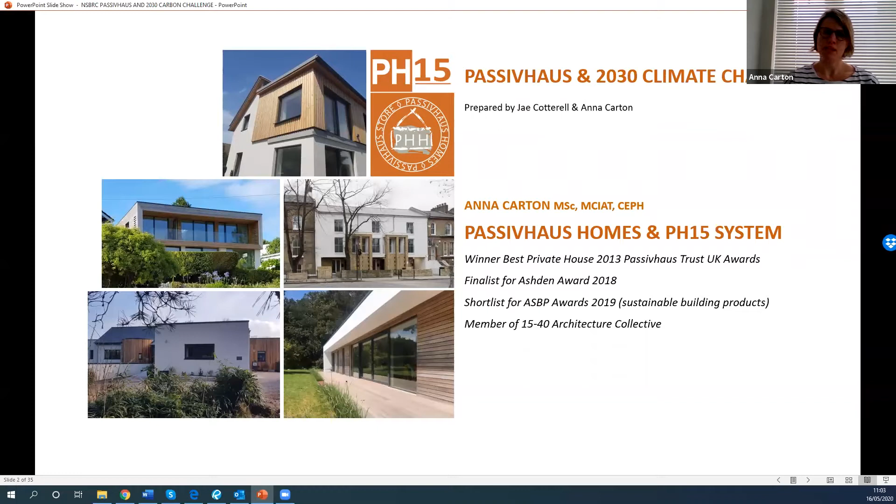But more recently looking at the embodied carbon side of it. So I'm going to start my presentation today by asking you all to ask a question of yourselves, really, which is: what's important, or what makes up a sustainable building, in light of the climate emergency and also the targets for 2030 and 2050?

The wheel on the screen is actually one that came about through a discussion with a number of other sustainable building designers and architects who have all worked in this field for over a decade, some people over 25 years.

All of us Passivhaus designers were in agreement that we should be focusing our energies on targeting operational energy, which is obviously the Passivhaus element, but Passivhaus also spills into what you choose to build with, and now with Passivhaus Plus and Passivhaus Premium, the renewable fuel sources you choose to run that building.

In our wheel, we've also got other things you might think are outside of sustainability. You might think design is outside sustainability, but obviously we're going to look after the buildings we appreciate aesthetically, so things like this are also important and might be in your wheel. Other things might be biodiversity, community, economics, etc. So I wanted to invite everybody to think about what would go into their wheel.

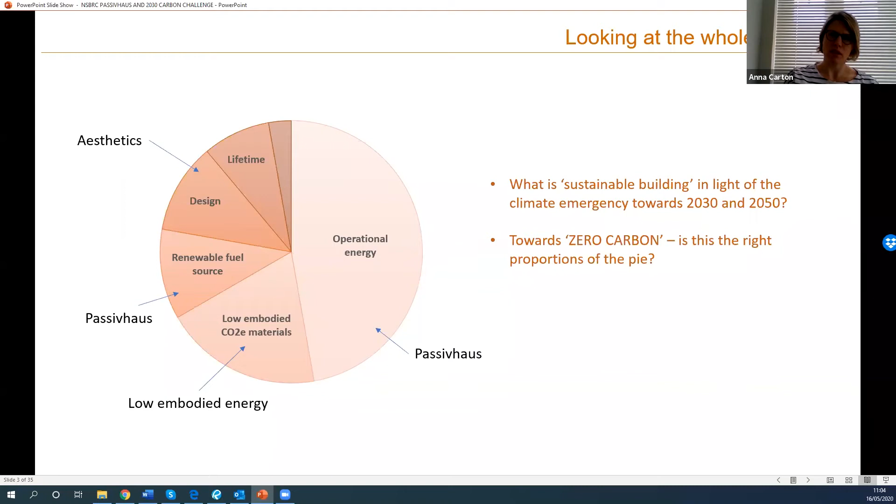The other thing I wanted to raise at the start of this presentation is this bar chart by Greenlite Energy Assessors, and this highlights three things really. The first thing is...

...that buildings are perhaps the longest lasting physical things that humans create. So the impact of your decisions as a building specifier or building designer will echo long into the future, and the impacts are far-reaching.

The second thing is that it's not just what you make the building of, but also what you put in the building—the components that will need periodically replacing. How many times they'll need to be replaced over the lifetime of the building is something to think about as well.

And the third thing this lifespan of things shows quite well, I think, is that 2030 is really not a long time away at all, and certainly not a long time in the context of building cycles—how long it takes to go from finding your site to finding a designer to actually building a project.

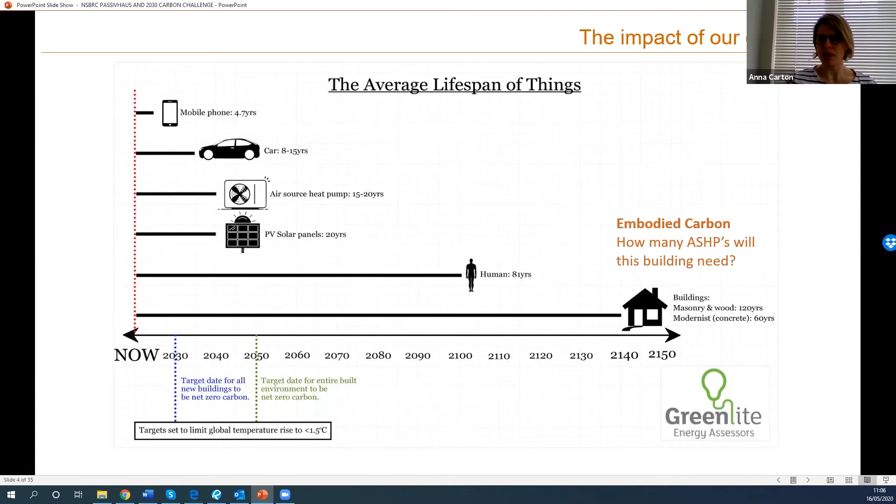It's a very, very short period of time. So you really need to know where we are and where we need to get to net zero carbon in just 9.5 years. So the RIBA published their climate challenge document towards the end of last year, I think it was in November.

They very helpfully provided a series of target metrics for domestic and commercial buildings, but I'm just talking about domestic buildings here. That covers three things: operational energy, embodied carbon, and also water use. I'm not going to talk about water use, just operational energy and embodied carbon.

If we look at the operational energy number, it's suggesting 0 to 35 kilowatt hours per metre squared per annum by 2030. You all know from Chris's talk that the space heat demand in a passive house should be 15 kilowatt hours per metre squared per annum or less. The Committee on Climate Change have suggested we need 15 to 20 by 2025 - in just 4.5 years - they are suggesting we move to the Passive House standard, or buildings that follow its principles, to get the space heat demand as low as possible.

So we think on operational energy, Passive House is sort of in the zone of where the RIBA are telling us we should be, where the Committee on Climate Change are telling us we should be. This is also in line with what the Green Construction Board is saying, what the Green Building Council is saying, what RICS, the Royal Institute of Chartered Surveyors, and CIBSE, the Chartered Institution of Building Services Engineers, are saying. So the designers' industry are certainly in agreement that we need to get operational energy down below 35 kilowatts.

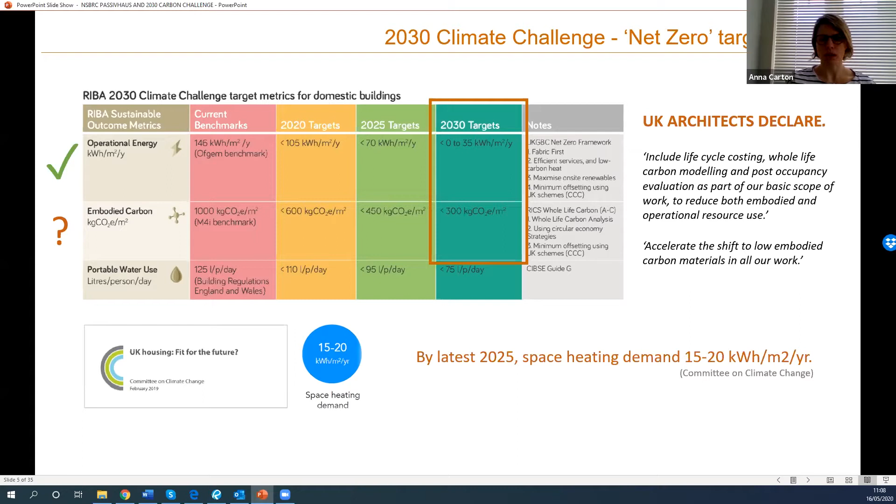In terms of embodied carbon, they've set a target of 300, and what I'm going to explore today is what that actually means. The reality is the sustainable building industry has probably been more focused on operational energy and less on embodied carbon until fairly recently. But now we're seeing much more focus on embodied carbon, and we're going to look at some examples in this presentation today.

So embodied carbon is measured using this British standard. If you look up an environmental product declaration certificate for some of your building products - some might not have them, but more and more companies are doing this and should be doing this - you should find they report embodied carbon values for each stage of the product: extraction of raw materials, transport to the manufacturing plant, manufacturing to site, construction, building use, maintenance, repair, replacement, refurbishment, and finally end of life - when you take the building apart, or whether it becomes recommissioned, reused, or the materials are disposed of.

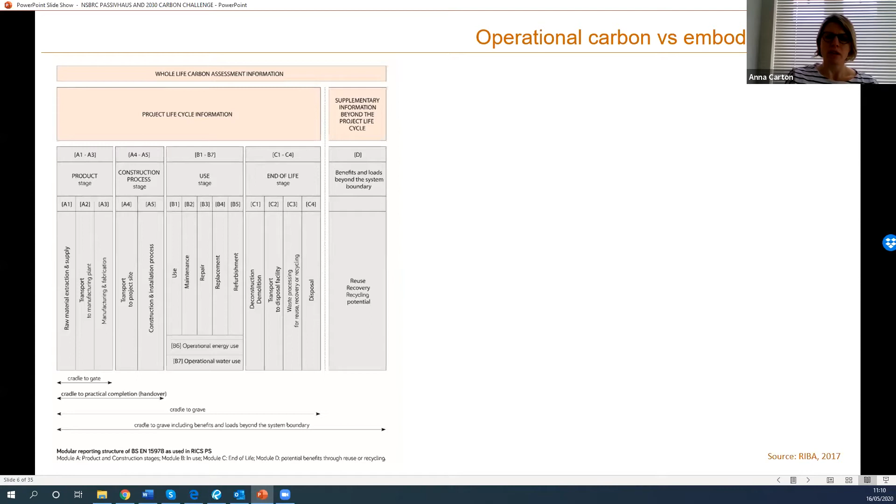So stage C perhaps requires a little bit of a crystal ball, particularly for a new building, trying to predict what might happen to it over 100 years - it requires many assumptions, but they can apply some figures based on today's values. So the RIBA Climate Challenge wants us to get to 300 kilograms of CO2 per metre squared across A1 to C4 - that's from taking materials out of the ground to disposing of the building at the end of its life.

Some materials have carbon sequestration potential - or carbon storage potential, I should say - materials like timber. But you can only count those right at the end of its life. So if you have a study that looks just at A1 to A5, you cannot count the carbon storage of those materials; you can only count them at the end, for obvious reasons.

Passivhaus, the Passivhaus standard, is directly only really interested in B6, which is operational energy use. But indirectly, because of the decisions you make to get there - looking quite closely at the building fabric - it obviously then covers all the other things indirectly.

So you might look at the table on the left and think B6 is just one stage of many - it looks relatively insignificant. But as the wheel on the right, which is a Simon Sturgis study, shows, it can make up a significant chunk of the whole life carbon emissions of a building. In this case, it's about a third.

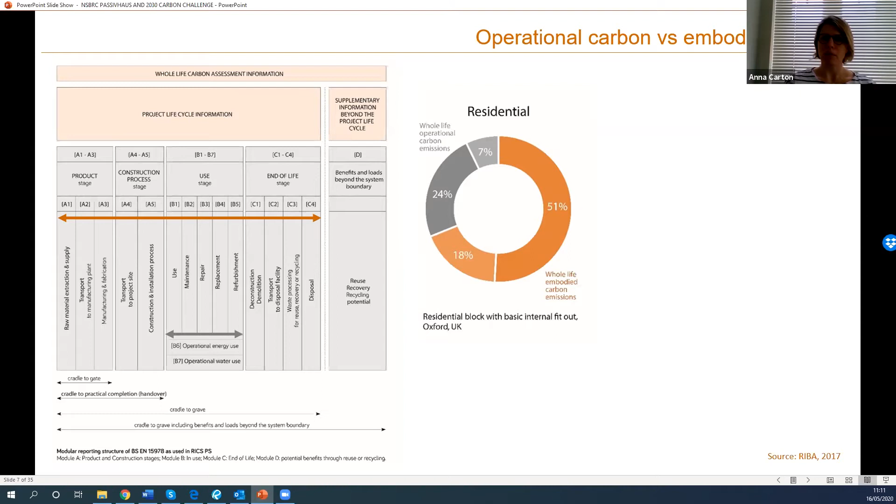In a particularly poor performing building, it might be more than that. In a better performing building, it would obviously be smaller.

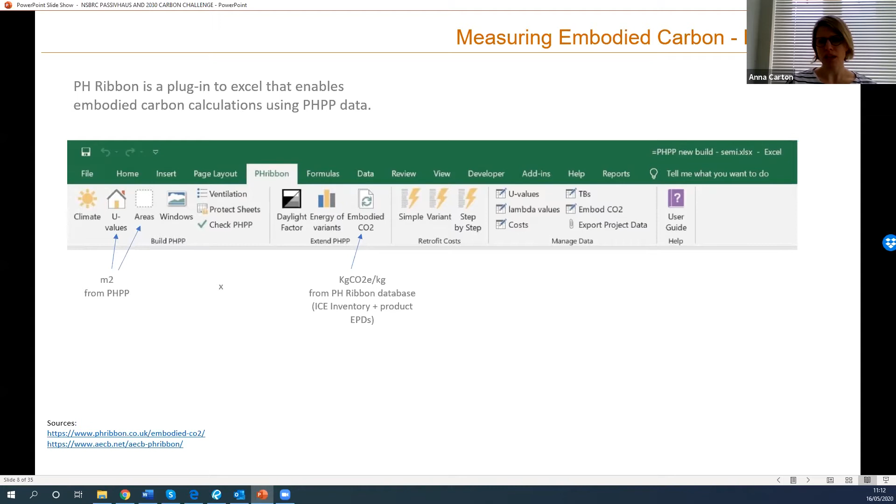A way of measuring embodied carbon for Passivhaus buildings is now available, called the PH Ribbon, which is very easy to use. It basically takes the information you've already put into your PHPP: you've already got the U value on the U value sheet, you've already specified all the materials making up the fabric of the building, and in the areas tab you've already assigned square meterage to those materials. Then it simply applies an embodied carbon value, or you apply one, to those materials, and it will do a calculation for you. We'll look at some examples in a minute.

So we know we've got to get from 1,000, which is the benchmark or target for today, 2020, down to 600, and eventually to 300. Now I'm just going to look at a few examples of what sort of numbers some typical domestic constructions are reaching.

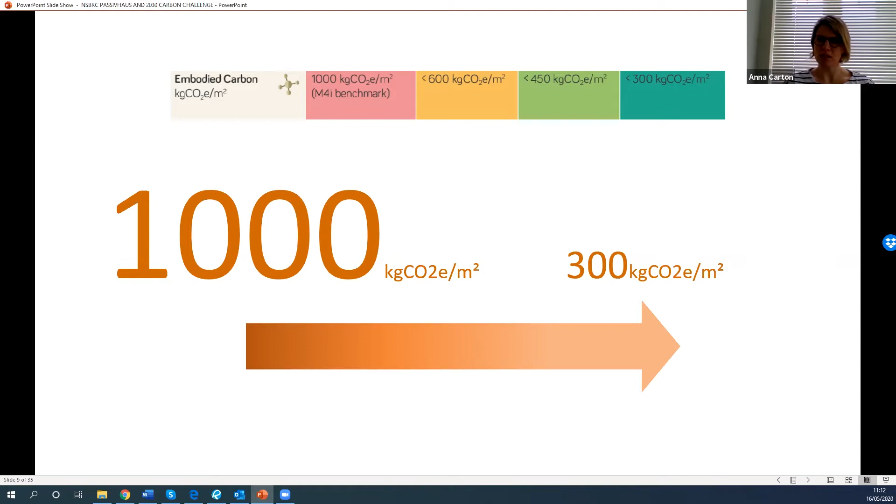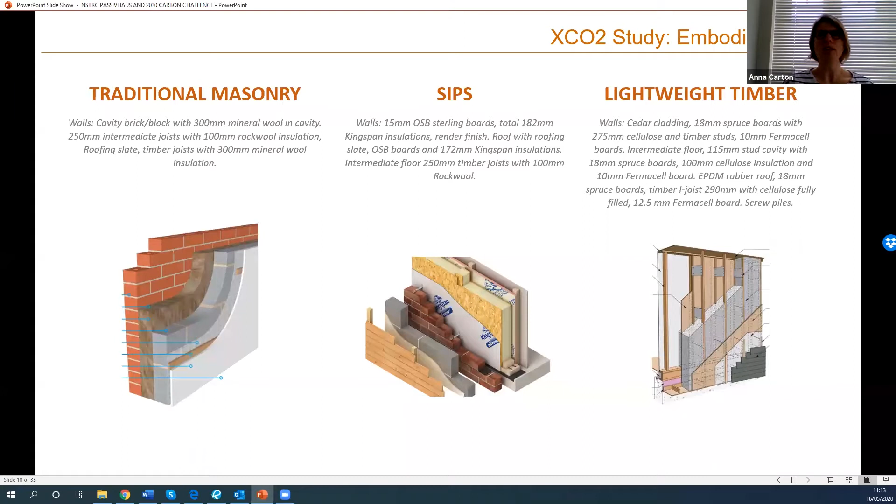If we look at traditional construction, this study, which is an XCO2 study, looked at traditional masonry, SIPs, and lightweight timber. But it only looked at cradle to gate, so that's A1 to A3, since the study is a few years old. So the figures we're about to see are only part of the picture.

Traditional masonry is coming out at 348, SIPs at 308, and lightweight timber, which we actually adjusted slightly to make all three options have a concrete slab and footings, is 231. So already we can see there may be a problem with the traditional masonry and SIPs options, because we seem to be failing and we haven't even got to site yet. Lightweight timber is coming in under the 2030 carbon challenge target, but again we're not even at site yet. So this 300 target is starting to look relatively challenging.

If you take the slab out, which is a significant portion of the embodied carbon, and you look at the building just above ground, you can start to see the real significant difference between the three construction options. There's a fourfold difference between the lightweight timber option and the traditional masonry option, and that's simply because masonry is heavyweight and also high embodied carbon. There's no carbon storage in these calculations because it's only A1 to A3.

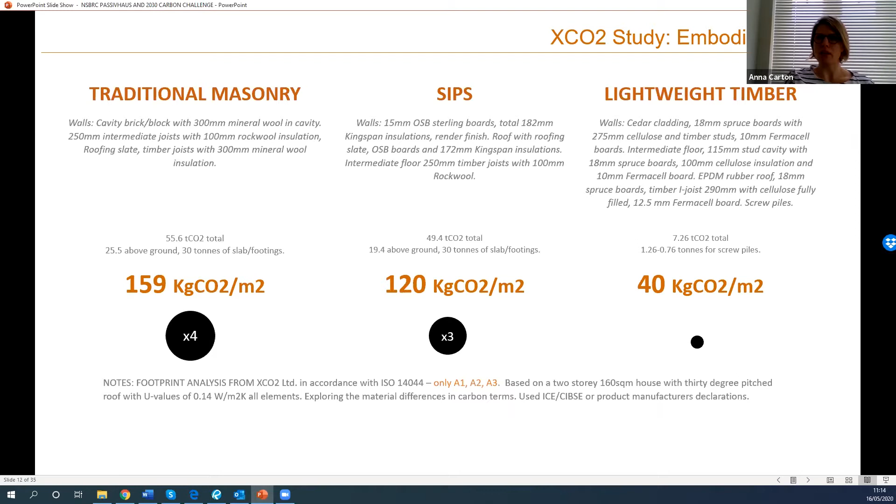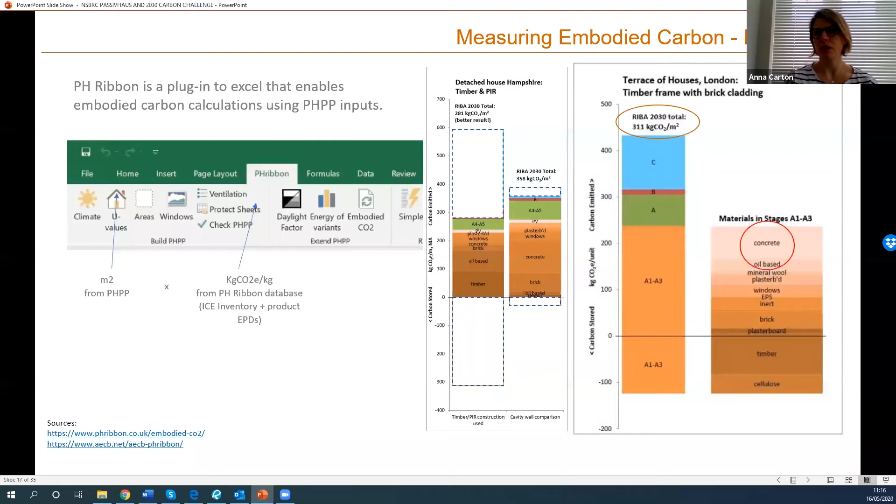Here is another example, also done by Tim Martin, looking at a timber frame terrace house with brick cladding. This obviously has the advantage of only having an exterior envelope on two faces. In this example we're not quite getting to the 300 — we're at 311. Again, the highest contributing materials are concrete and brick.

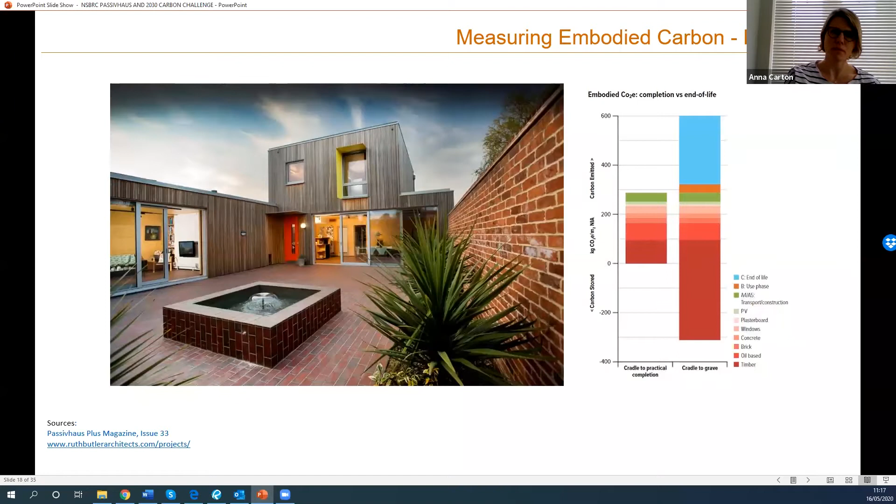So unsurprisingly perhaps, the Committee on Climate Change have identified that timber will be key to displacing high carbon materials such as cement and steel, and one of the most effective ways of using limited biomass resources to mitigate climate change. They want the UK to increase timber frame construction systems tenfold in order to triple the amount of carbon stored in UK homes.

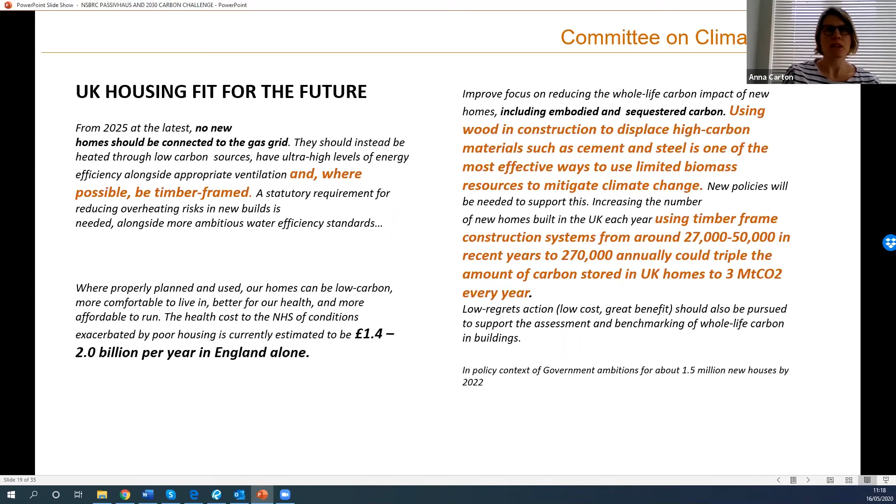Just before we go back to operational carbon, I want to summarise what we've just looked at: this target of 300 kilograms of CO2 looks quite challenging to achieve, and it looks particularly challenging or even unachievable with more typical ways of constructing in this country, which is cavity wall, heavyweight, lots of concrete, lots of massive masonry materials.

So if we go back to operational carbon, which I said is where we've sort of been focused as sustainable building designers and where we perhaps feel that we're doing better, we know that Passivhaus is 15 kilowatt hours of space heat demand, so we've got 20 left for all of our electrics, etc. So how are we doing?

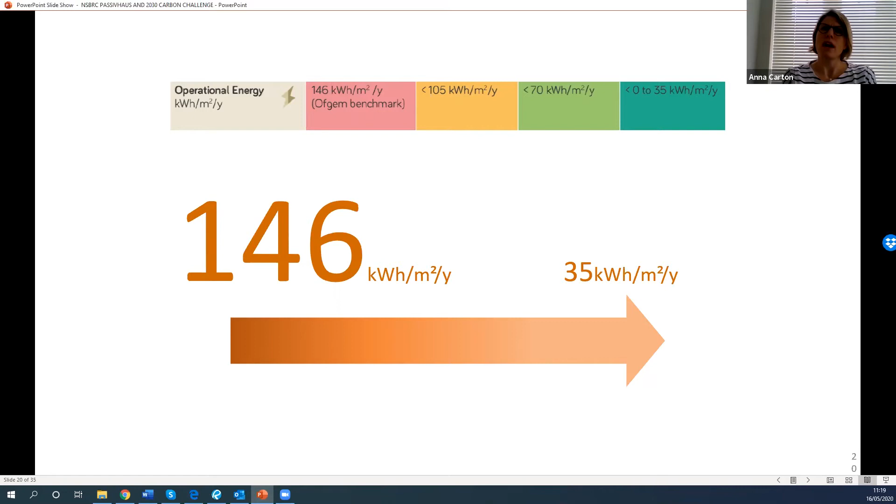Well, we looked at this number in the context of one of our projects. This is a PH15 project down near the New Forest. It's a detached house, quite a large detached house, 184 square meters of treated floor area. It's got a very low space heat demand - it did incredibly well on the air tightness, so it's a very low space heat demand.

It has a small PV array, and at the moment it has a gas boiler for heating and hot water. The client had wanted to go for an air source heat pump, but it was slightly out of their budget. So the idea is that they have a gas boiler for now, and then spend the next few years saving up for an air source heat pump and retrofit that in as soon as they're able.

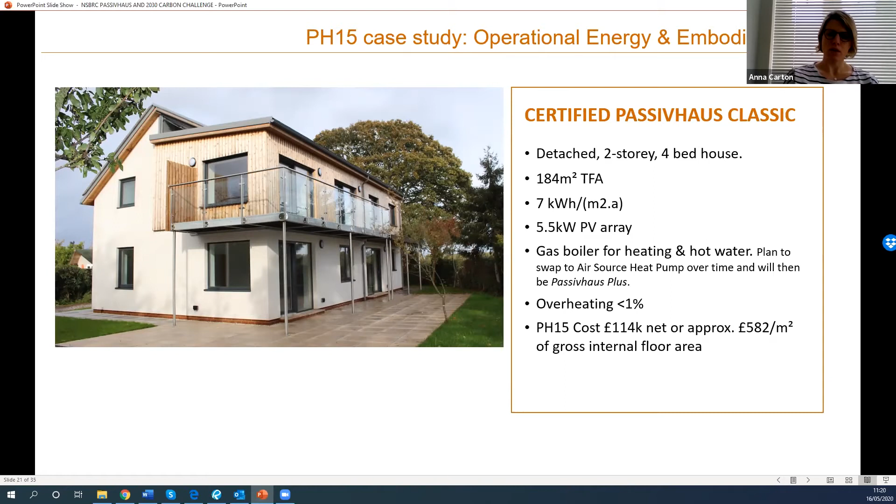So we looked at this house in terms of its current setup, which is basically a Passivhaus Classic - a gas boiler and a small PV array. A different option for Passivhaus Classic might be electric grid heating and hot water, and then what they want to move to, which is a Passivhaus Plus, air source heat pump, and the same PV array.

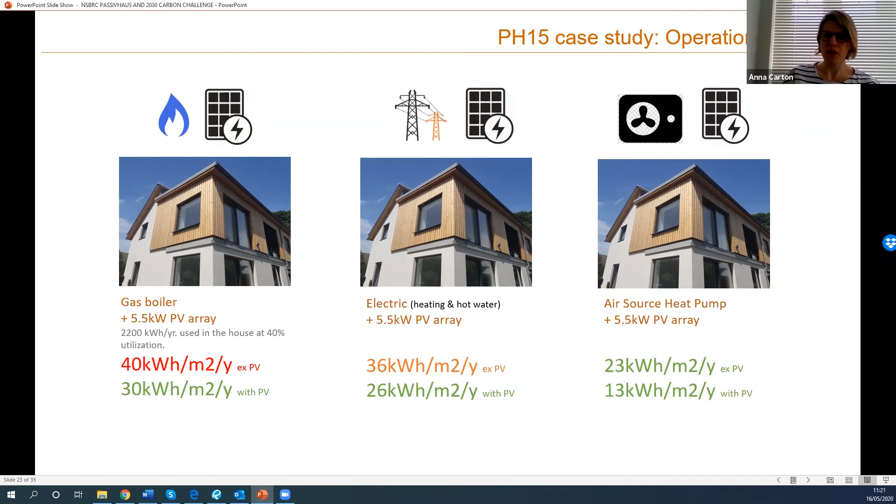The Passivhaus Classic options without the PV are not meeting the operational energy targets, the RIBA operational energy targets for the 2030 climate challenge. With the PV array they are, but by far the best performing, unsurprisingly, option is the air source heat pump, where you are obviously getting more - if you have a COP of 2, you're getting twice the amount of energy out that you put in.

If you convert - because obviously the operational energy is looking at kilowatt hours, the embodied energy is looking at kilograms of CO2 - so if we try and create some kind of comparison, we need to convert the operational energy into carbon. So if we apply a carbon intensity to these two forms of energy, gas and electricity, the difference becomes even starker.

So you apply that over a lifetime of 60 years, and you're looking at 65 tons of carbon over 60 years if you have a gas boiler, and just 12 if you have an air source heat pump. So that's an extra 53 tons of carbon over the 60-year lifetime.

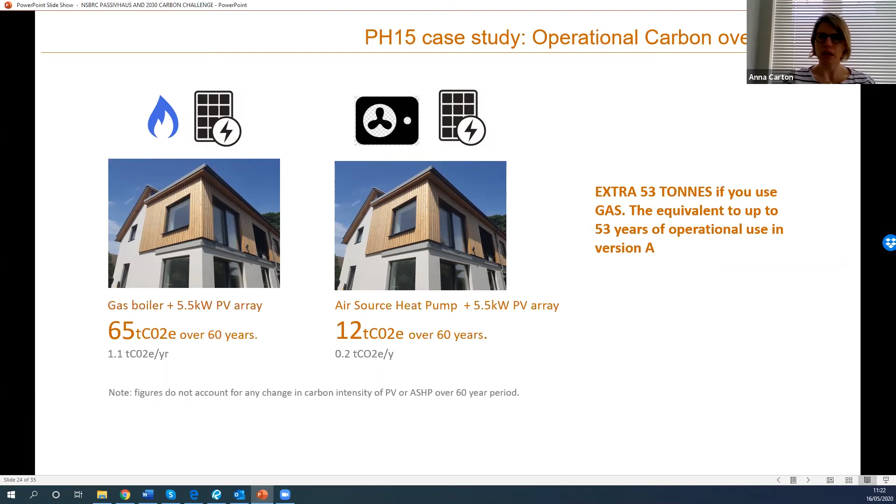And that's just the difference between going, if you choose a Passivhaus Classic building versus a Passivhaus Plus, and obviously if you use a Passivhaus Premium, then that's going to be better.

And the reason for that is that the carbon intensity of electricity has come down massively in the last 10 years. This graph is courtesy of Etude, and they told me that the drop is to do with the closing of a couple of coal-fired power plants. So if anyone was in any doubt of the impact of coal power plants, I think this graph highlights what a difference it can make if we move towards clean energy.

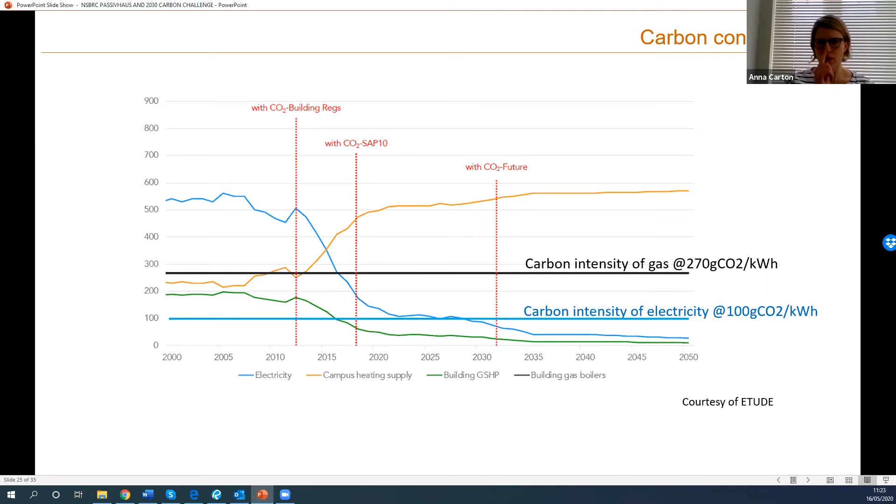There's obviously also been a drive towards much more wind-driven power in the UK, and eventually there will probably be more nuclear power coming in as well. So gas obviously is fixed - the carbon intensity of burning gas is fixed. So last year you might have read in the press lots of headlines like gas is dead and no more gas in new buildings. And this is the reason why electricity is the future for heating and hot water in domestic buildings.

So if we go back to the question of the wheel at the beginning and the balance of us looking at operational energy and embodied energy and where we should be putting our energies as designers - we apply the XCO2 figures to this PH15 house, which is of a similar size.

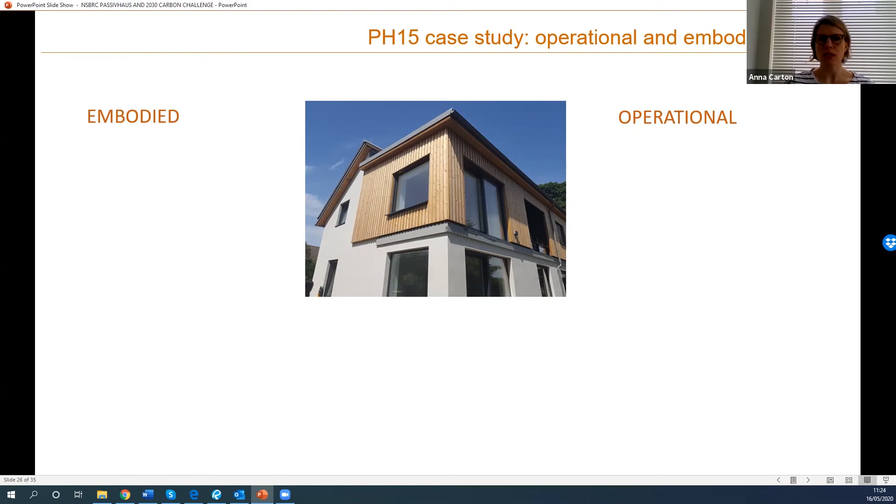The XCO2 study was a 160 square meter house. This one is 180, so we did a slight adjustment, and we got 37 tons of CO2. The masonry example in the XCO2 study was around 55 tons of CO2, so it's about 2/3 of a masonry building.

But bear in mind, this is only A1 to A3. What we're looking to do as a company is use PH Ribbon to do A to C studies on all of our buildings in the future.

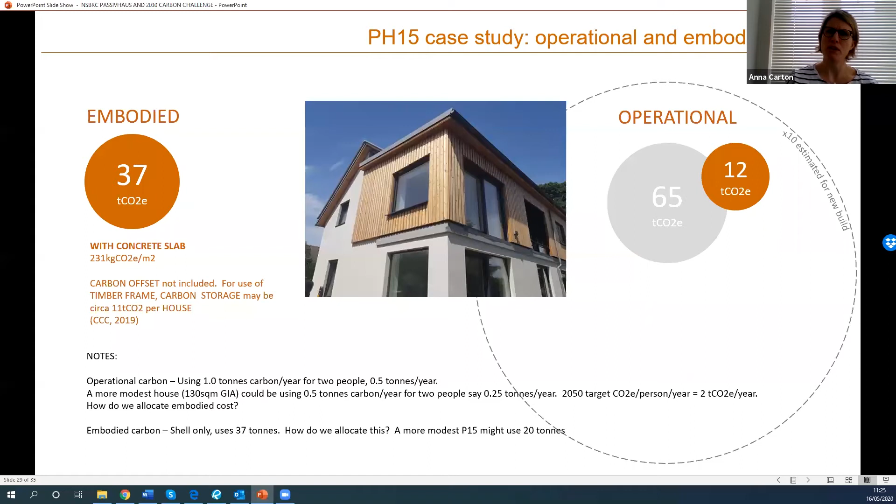If you went with a building reg standard building, that's probably about 10 times what this house was, perhaps even slightly more. So you can see that relative to the embodied carbon, if you're looking at 10 times the amount of operational carbon, suddenly that B6 in the life cycle assessment is looking relatively very important. I think that just highlights why we've been focused over the last 10 years on getting operational energy down.

To look at those results a slightly different way, this is an illustrative graph. It doesn't factor in fluctuations in the intensity of fuels. I've included one replacement of components, but the point is to illustrate that with the gas option and the air source heat pump, you can see them diverging across the first 15 years of that building. Then if the clients replace their gas boiler with an air source heat pump after 15 years, that gap will just be maintained - you'll never make back that carbon expenditure.

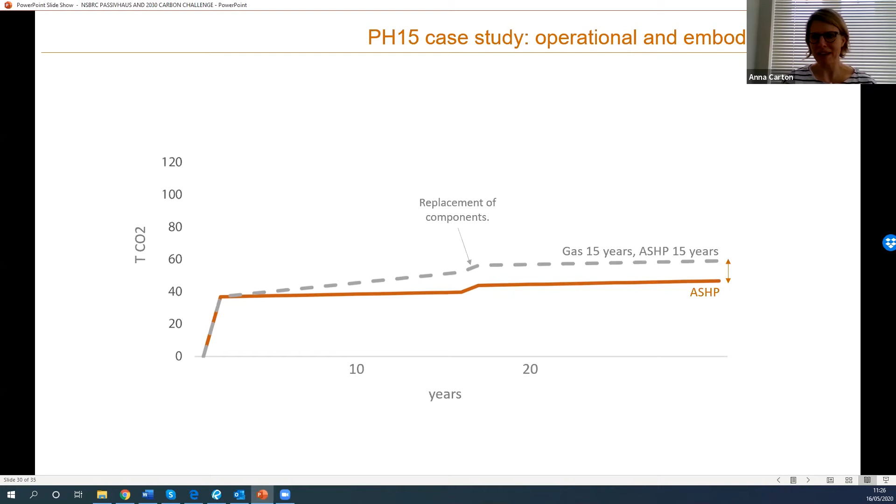The other thing I'm using this to illustrate is that if we have 10 years not just to get to the 2030 net zero target, but also address the climate emergency - if the next 10 years are critical - the decisions you make about the amount of carbon you're going to pump into the atmosphere as a result of the materials you specify start to look very significant.

The carbon over the next 30 years in this example, because it's a low energy building, is significantly smaller. But also, if the next 10 years are critical, and the consensus generally is that they are, we really should be focusing our minds on the materials we're specifying when commissioning or designing our buildings.

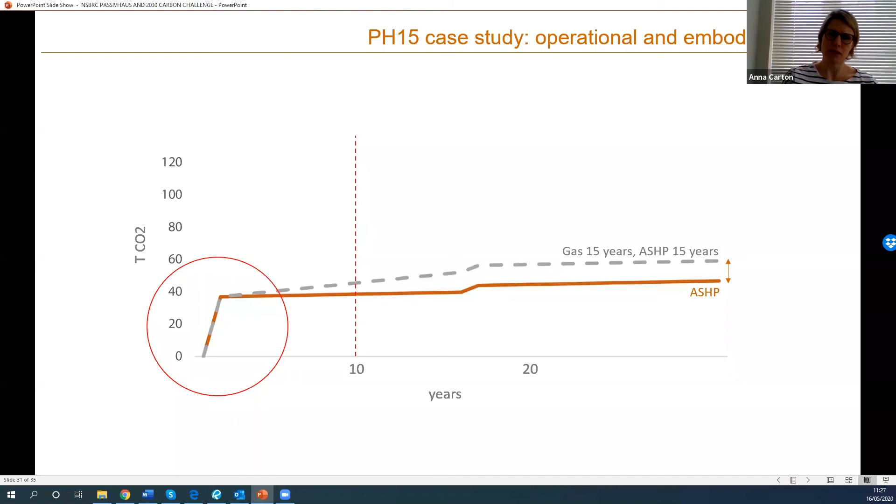If we look at the same house but make it twice the size, suddenly that initial impact is obviously twice as large. The impact of a gas boiler - you're going up at a rate double the rate over the next 15 years.

It's just to highlight that these metrics are per meter squared, but you also need to think about the total impact. The bigger the building, the more material you use to build it, the bigger the carbon footprint. The bigger the building, the more energy you use overall to heat it, the bigger the impact over time.

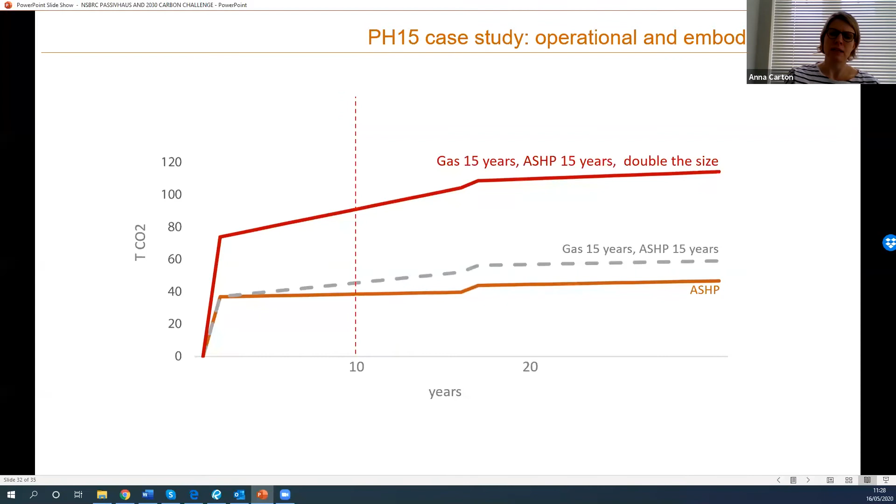This last grey line is just to illustrate that if you built a building twice the size, or that just had twice the carbon footprint, and then had it at building regs standard, you're off the charts within the first 5 years.

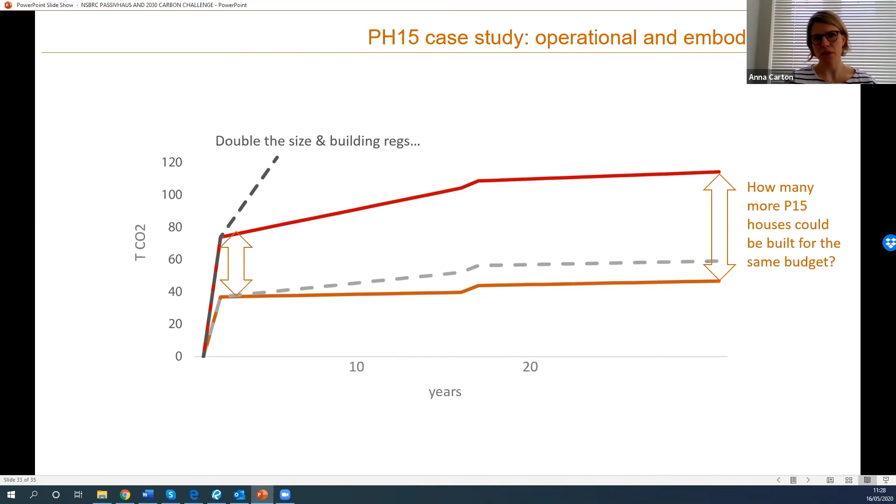So in summary, what I'm trying to highlight with this presentation is that we need to look at all three things: the relationship between operational demand of the building, the embodied carbon and materials we choose to build it out of, and the fuel source we specify. Also, just to remind everyone that the early decisions you make can have long-reaching impacts.

I think what I've come to learn working in this industry for 15, 20 years is that once you've made a decision, you become quite attached to it - it's quite hard to let go of that decision. So if you decide you want a masonry house early on, it's quite hard to go back from that. Think about some of these things early on to avoid having to detach yourselves from those decisions later.

The RIBA 2030 Climate Challenge points quite clearly towards Passivhaus - if not just the Passivhaus standard, but certainly Passivhaus principles - and low carbon fuels for operational energy use. As you saw with the example of our passive house in the New Forest, which is just 7 kilowatt hours of space heat demand, with a classic gas system we're not quite meeting the challenge. So we really do need to get operational energy use down and then look at renewables.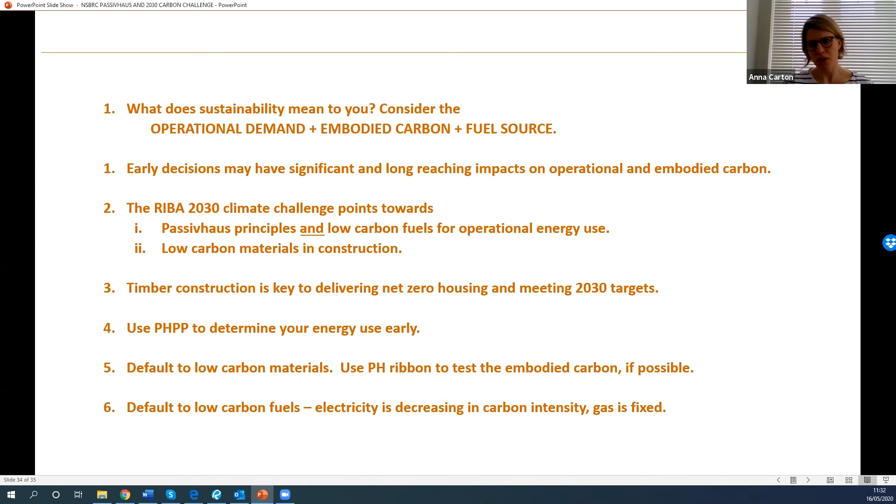And then obviously default to low carbon fuels. Electricity is decreasing in carbon intensity and will continue to do so over the next decade, hopefully, unless we change our energy mix again. Gas is fixed.

So back to our wheel, and I've adjusted the wheel to show operational energy, embodied materials and fuel source are sort of equal. They're all equal because they're all interrelated, and it's the relationship or the interplay between those three that is key to not only getting a sustainable building, but also to meeting the RIBA 2030 challenge.

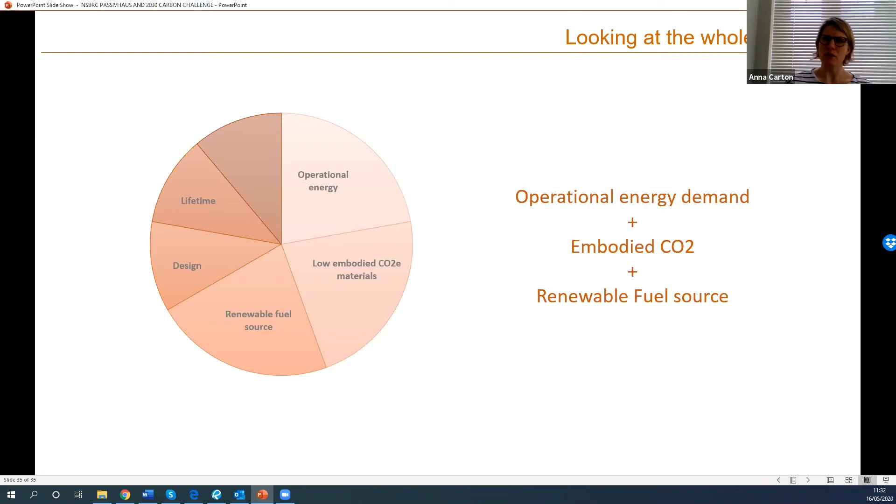And that is it. So, open it up to questions. Oh, now I can see the chat.